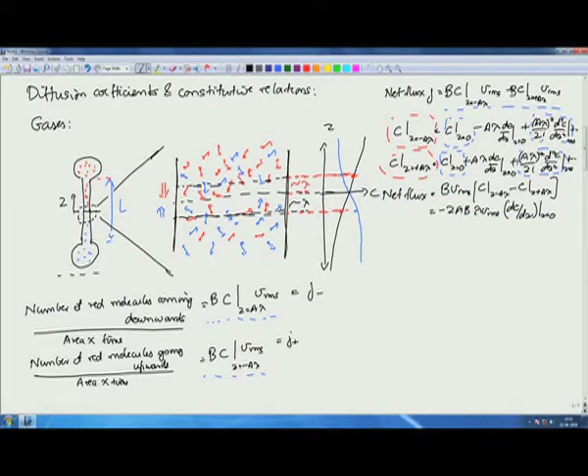If you look at mass diffusion, for example, diffusion takes place because molecules transported across a surface are coming on average from distances above and below the surface. So there is a concentration variation, and the net number of molecules coming from below will be different from the number of molecules going above.

Therefore, the diffusion flux is related to the variation in the number of molecules over a distance comparable to the mean free path, because these molecules coming from above and below are coming from distances comparable to the mean free path. So the variation over distances comparable to the mean free path is what causes molecular diffusion, and that variation is proportional to the mean free path times the derivative of the concentration, velocity, or temperature across that surface.

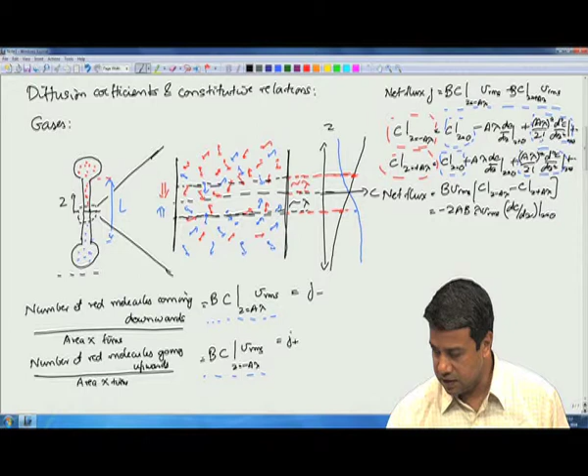That is the fundamental principle of diffusion, and that is the reason all diffusion coefficients in gases scale approximately as the product of the mean free path and the molecular fluctuating velocity, times some constant. I had shown you in detail how this derivation is carried out.

We had estimated in gases the root mean square fluctuating velocity and the mean free path. The root mean square of the fluctuating velocity is comparable to the speed of sound in the gas, about 300 meters per second in gases like oxygen, nitrogen, and air. In small molecule gases it is significantly higher because the mass is lower.

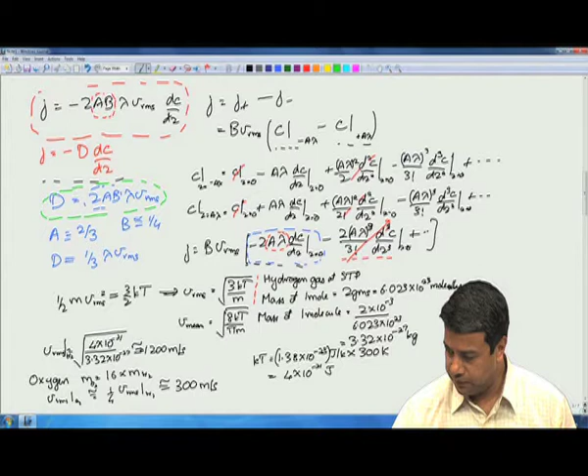The mean free path varies approximately between about half a micron to 0.06 microns. We had done that calculation a couple of lectures ago, where we estimated it on the basis of the volume swept by a molecule as it travels through the gas.

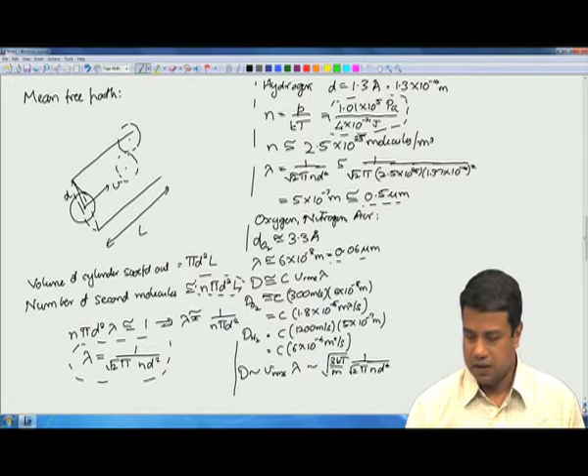On that basis we obtained diffusion coefficients in gases in the range of approximately 10 power minus 5 meter square per second. For all gases, the diffusion coefficient is approximately 10 power minus 5 meter square per second.

If you use similar arguments, you would estimate the diffusion coefficient in liquids to be about 100 to 1000 times lower. That, however, is not true, and the reason is that diffusion in liquids depends upon the physical transport of molecules in a liquid, and in a very densely packed cluster of molecules, the transport of one molecule in any direction requires the cooperative motion of all other molecules around it. Therefore, diffusion in liquids is a much slower process.

And I had given you this relation for how to estimate the diffusion coefficient in liquids.

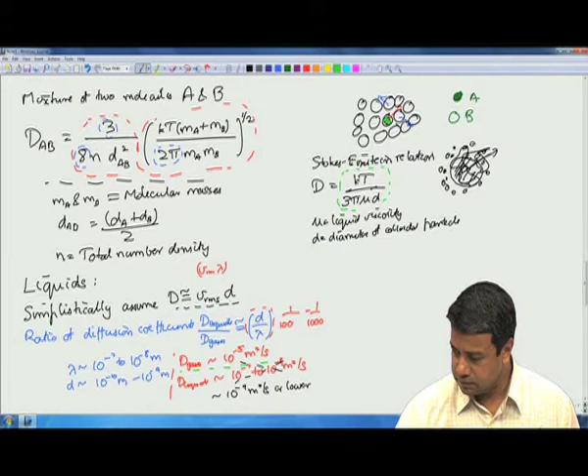We talked about momentum diffusion. Instead of concentration, you have the velocity in the x direction, which is what is being transported. The momentum in the x direction is what is being transported across the surface, and there is a variation in the momentum in the x direction only if there is a variation in the mean velocity of the gas across that surface.

Note that x is the direction of the momentum itself, or the velocity itself. Velocity is a vector. Z is the direction in which that momentum is being transported, across a surface in the z direction, because the perpendicular to that surface is in the z direction.

We had made a slight distinction here: the stress is defined as positive if the force is exerted on a volume whose outward unit normal is in the plus z direction.

That corresponds to the volume below the surface, because for this volume the outward unit normal is in the plus z direction. On that basis we calculated the momentum flux across the surface, and compared that with the expression for Newton's law of viscosity, and got an expression for the viscosity coefficient itself.

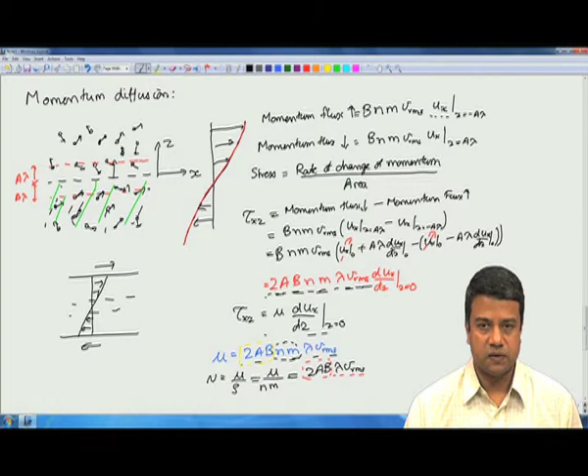The viscosity coefficient is equal to the number density times the molecular mass, that is the mass density, times the mean free path times the RMS fluctuating velocity. The kinematic viscosity is the ratio of dynamic viscosity and density, which gives the same expression as the mass diffusion coefficient: mean free path times the molecular fluctuating velocity times some constants. So the kinematic viscosity has the same dependence on fluctuating velocity and mean free path as the diffusion coefficient. This is not surprising, because both the transfer of mass and momentum take place by the same physical mechanism, the transfer of molecules across a surface. Therefore, the diffusion coefficients turn out to have the same dependence.

I had written down a more exact expression for the diffusion coefficient, and for the viscosity, for a molecular gas. Therefore, the Schmidt number tends to a constant for a gas, independent of any other parameters, in a dilute gas.

Now, momentum diffusion in liquids.

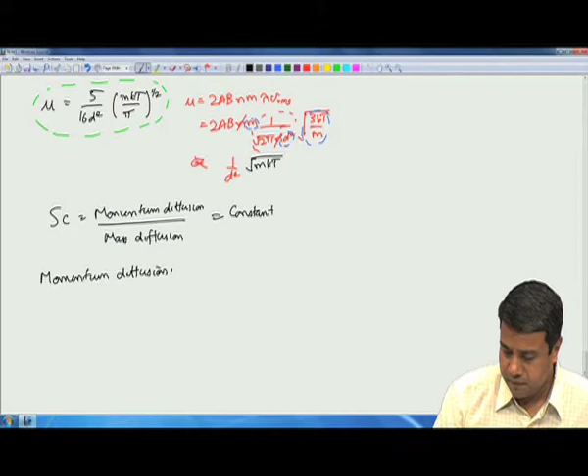Take the simple case of water molecules. Liquid water has a viscosity which is about 10 power minus 3 kilograms per meter per second, and the density is approximately 1000 kilograms per meter cubed. That means the kinematic viscosity is 10 power minus 6 meter square per second. That is, I just take the dynamic viscosity divided by the density and I get about 10 power minus 6 meter square per second.

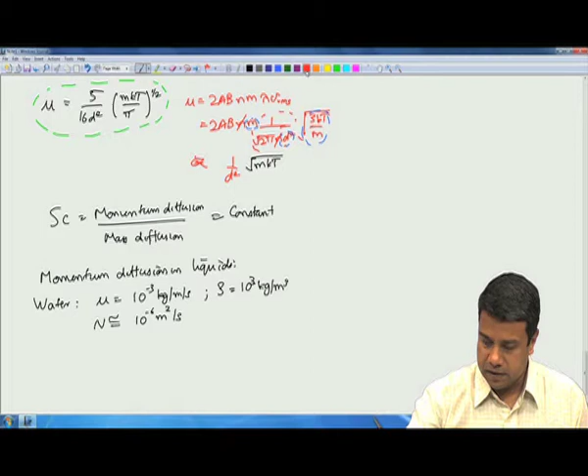Recall that I had told you earlier that mass diffusion in liquids is much slower, of the order of 10 power minus 9 to 10 power minus 10 meter square per second. Therefore, in liquids, the kinematic viscosity, the momentum diffusivity, is much larger than the mass diffusivity.

The reason for that is as follows. In a liquid, all the molecules are densely packed. As I had explained in my discussion on mass diffusion, the motion of any one molecule in any direction requires that other molecules nearby move cooperatively so that this molecule can move in any one direction. For that reason, mass diffusion is a very slow process in liquids.

Momentum diffusion does not require the physical transport of molecules. Mass diffusion of a solute, for example, does require the physical transport of a molecule, because the solute molecule has to move across the surface in order for mass to diffuse. However, momentum diffusion can take place due to intermolecular forces. The fact that one molecule exerts a force on another molecule can serve to transport momentum, molecules do not have to physically move across a surface.

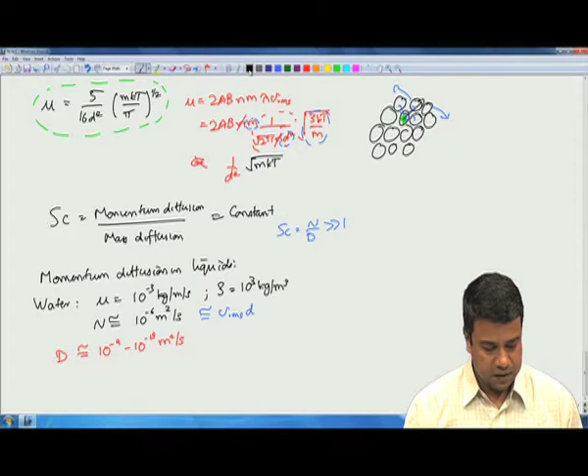So the final topic that I need to go through is thermal diffusion.

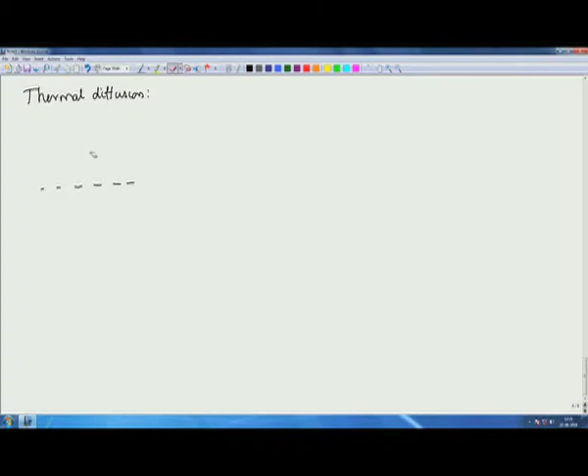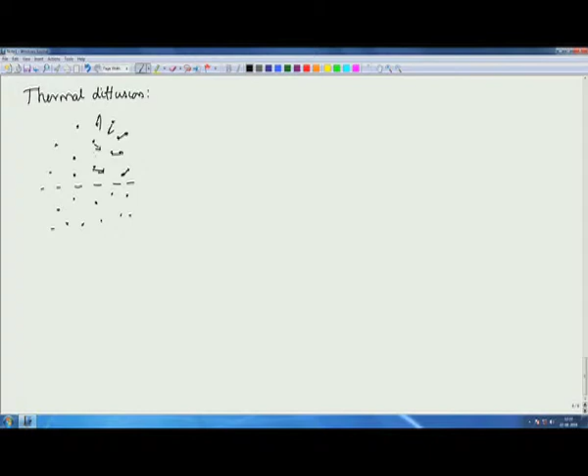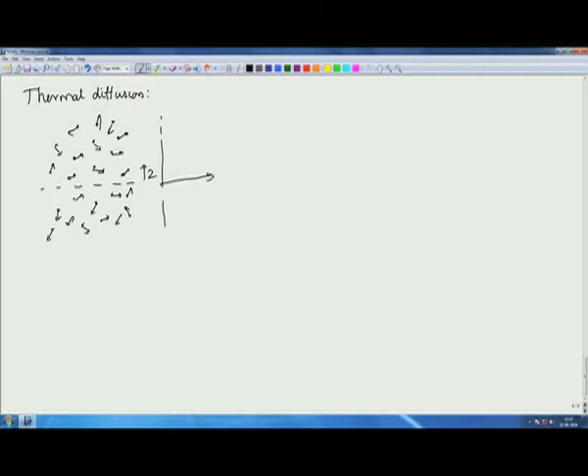Okay, once again, if we have molecules having fluctuating velocities across the surface—this is the z direction—on average, the fluctuating velocity, so the temperature of the molecules below the surface is greater than that above the surface. So let us say there is a temperature gradient across the surface.

In this case, if you maintain the temperature gradient, this could for example be a small section of a fluid in which you imposed a temperature gradient, because this is a hot surface—I have written it the other way around, let me change that. This has a higher temperature T hot, and this has a lower temperature T cold. You have two surfaces, one heated, one cold, and there is a temperature difference across the two.

And if you take a small section within this, and then expand out that section, it will look something like this. There is some temperature variation across the surface. The molecules below have a higher fluctuating energy, and the molecules above have a lower fluctuating energy, due to which, as the molecules move across the surface, there is a net transfer of energy across the surface due to this molecular motion.

Once again, the reason for this transfer of energy is because the molecules below the surface come on average from a distance of the order of the mean free path below the surface, where the temperature is higher. Whereas the molecules above the surface come from some distance above the surface where the temperature is on average lower.

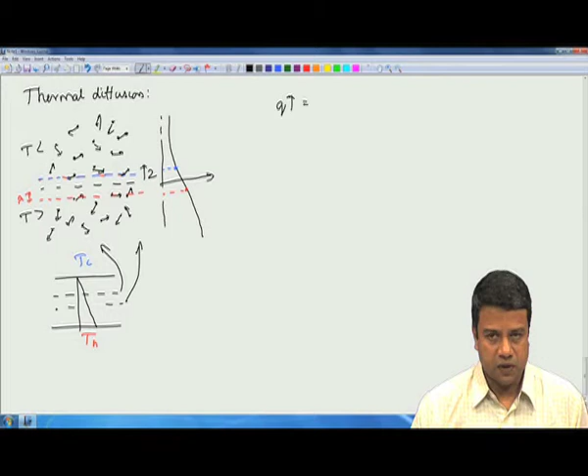So what is the heat flux due to these molecules? The heat flux going upwards is equal to the average energy of the molecules going upwards times the fluctuating velocity times some unknown constant. It is going to be equal to some constant times the product of the fluctuating velocity times the energy density at the location z is equal to minus lambda.

Note that in this case, if the temperature is varying, the RMS fluctuating velocity also varies across the surface. If you recall, the RMS fluctuating velocity was equal to root of 3kT by m, and the mean free path was equal to 1 by root 2 pi n d squared. So if the number density does not change, the mean free path does not change, but since the temperature changes, the fluctuating velocity also changes.

So therefore, this is the flux going upwards; the flux going downwards is equal to B times Vrms times the energy density. The flux is equal to a velocity times the density of that quantity at the location A lambda.

And now we of course know what to do. The total flux Q is equal to Q upwards minus Q downwards, which is equal to B into Vrms, E at Z is equal to minus A lambda minus...

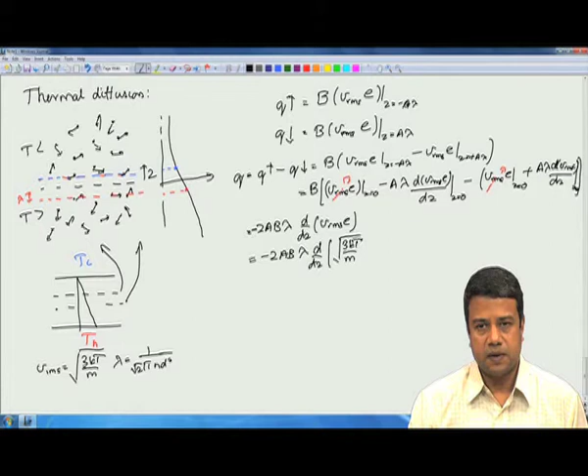So therefore, minus 2 A B lambda d by dz of root of 3kT by m, into the thermal energy will be equal to N Cv times T, where Cv is the specific heat at constant volume. N Cv T is the energy per unit volume, the internal energy per unit volume.

And when I take the derivative of this, since this is proportional to T to the 3/2 power, I will get minus 2 A B lambda times a factor of 3 by 2, because I have a T to the 3/2 power in this expression—there is a T to the half here and a T here. And then I will get N Cv times root of 3kT by m, times dT by dz. So that is going to be the flux of thermal energy across the surface.

NCV is the number density times CV, the specific heat per unit mole. If I were to write it in the traditional form, the specific heat per unit mass you're used to, I need a factor of the molecular mass, giving Nm CV T. So m times n gives Cv as the specific heat per unit mass.

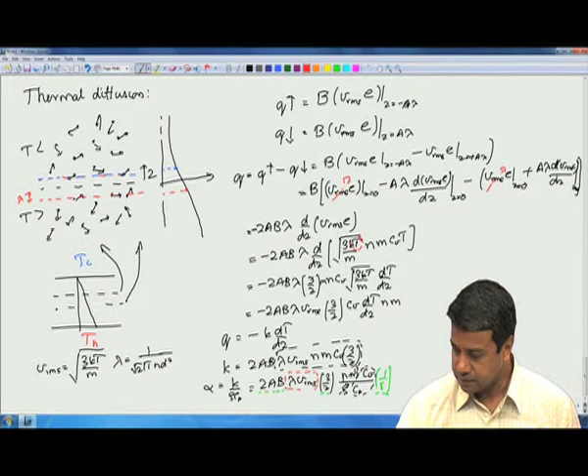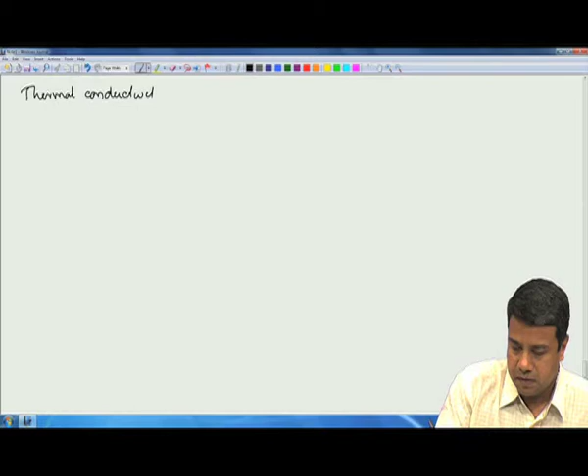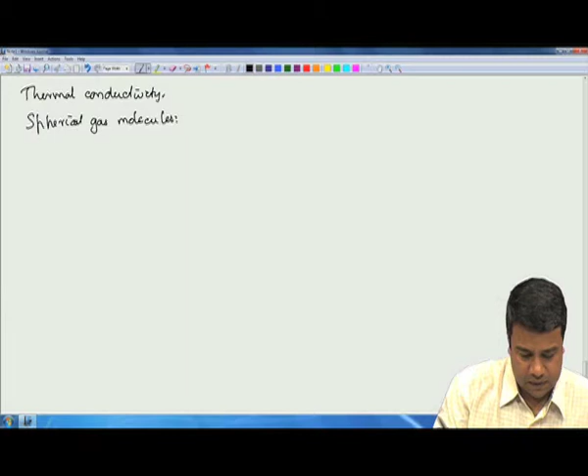Once again, you can use kinetic theory calculations to get more exact expressions for this thermal diffusivity. For example, in the case of spherical molecules, the thermal conductivity is given as 75 by 64 d squared into k cubed T by pi m to the 3 halves.

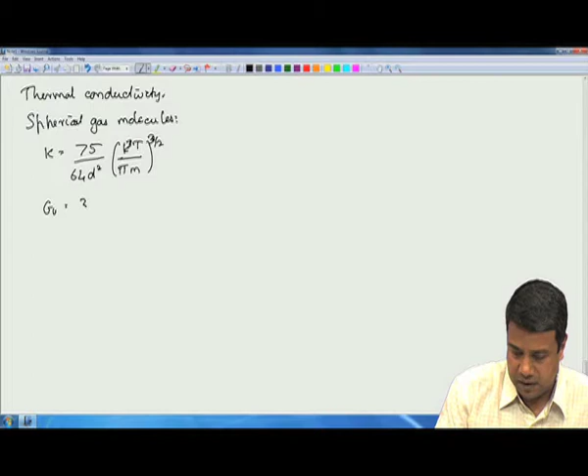That is the expression for thermal conductivity in a monoatomic gas, where Cv is equal to 3k by 2m. 3 by 2 k is the specific heat per unit mole, so if you divide by the molecular mass you get it per unit mass. This is the expression for thermal diffusivity in a gas, for a monoatomic gas, and you can see the coefficients vary.

So from this I will get the thermal diffusion coefficient as k by rho Cp, which will be equal to 75 by 64 d squared, into Nm, number density is Nm, and I get k by Cp into the root of kT by pi m.

And if I take this, root of kT by m, into k by m Cp, into 1 over the number density, you can see that this becomes, within a constant 64, 1 by n d squared root of kT by m, times k by m Cp. M Cp because Cp was defined on the basis of per unit mass.

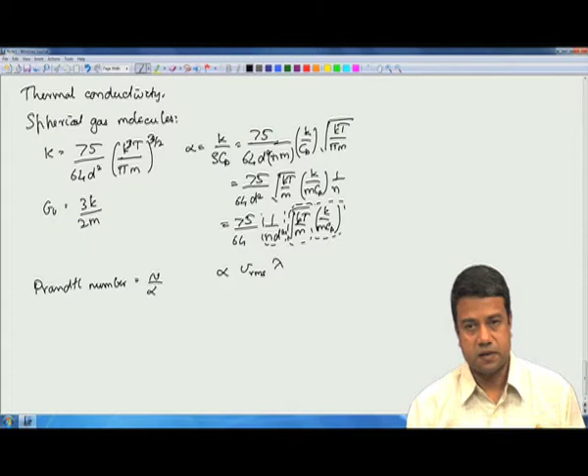Now, what about liquids? In the case of liquids, the thermal diffusivity actually depends upon the mechanism of energy transfer. So, in gases, energy transfer has to take place due to the physical motion of molecules across the surface. Not so in liquids—the mechanism differs.

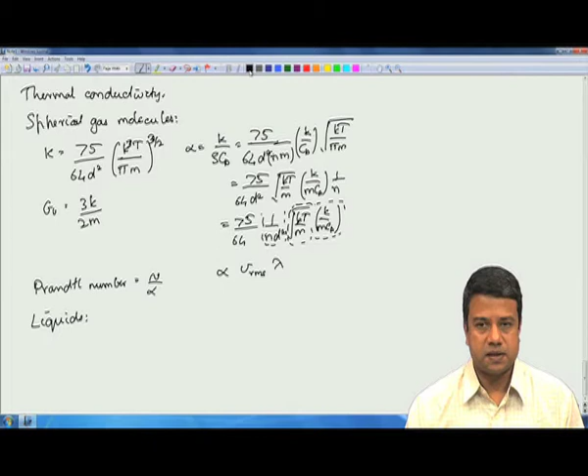In the case of organic liquids, and to some extent even in water, this takes place due to contact forces, the intermolecular forces between the molecules. So if you have a higher temperature at one location and a lower temperature at another, the intermolecular forces between the molecules can transfer energy from one molecule to the other. It does not require the physical motion of molecules for energy transfer to take place.

Due to this, like momentum transfer, energy transfer is in fact faster than mass transfer, because mass transfer requires the physical motion of molecules, whereas energy transfer and momentum transfer do not in general. In fact, in liquid metals,

the energy transfer is not due to intermolecular forces, but rather in metals you have these molecules which share a sea of electrons around them. This transfer through the sea of electrons—you know that in metals, the outer shell electrons are all shared between all the metal molecules, atoms.

In solids it is in a lattice. In molten metals it is in a liquid state, where these molecules have fluctuating motion, but they have electrons around them, and these electrons are able to transport energy much faster than through intermolecular forces. Due to that you have very high thermal conductivities, and very high diffusivities.

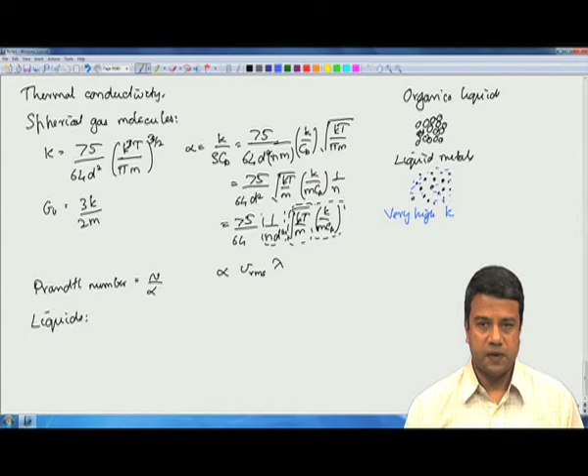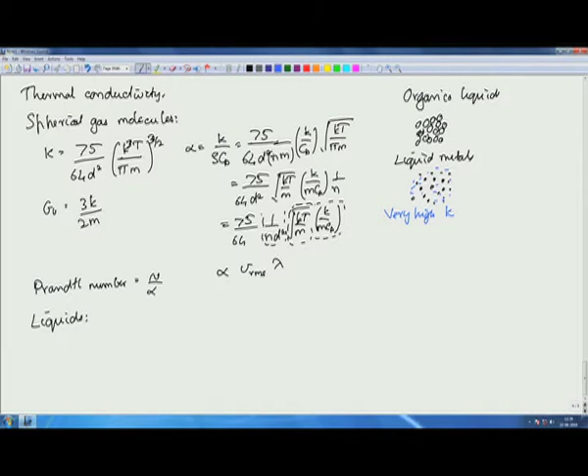So in the previous 4 lectures, I have tried to give you a physical understanding of diffusion, how these constitutive relations arise from a molecular picture. In the case of gases, we have managed to get these coefficients fairly accurately, just based upon simple arguments. The diffusion coefficient in all cases—the mechanism of diffusion is due to the physical transport of molecules. Diffusion coefficient therefore is proportional to the mean free path times the RMS fluctuating velocity. All 3 diffusivities are comparable. Therefore, the Prandtl and Schmidt numbers are all of order 1.

In the case of gases, the diffusion coefficients for all 3 are comparable, about 10 power minus 5 meter square per second at normal temperatures. For liquids, the picture is different. Mass diffusion is slow because it requires cooperative motion, and I gave you an example of formulas that can be used to estimate those. Momentum diffusion is relatively faster—the kinematic viscosity for water is only about 10 times lower than that for gases, and the reason for that is because momentum is transported due to intermolecular forces rather than due to the physical transport of molecules.

In the case of energy transfer, it depends on the details of the mechanism. In non-polar organic molecules, conductivity is relatively low. In the case of liquid metals, the conductivity is relatively high because the transfer takes place due to the electron gas around the molecules. This also gives you some idea of the magnitudes of the diffusion coefficients, the dimensionless numbers, the Prandtl number, the Schmidt number, and so on.